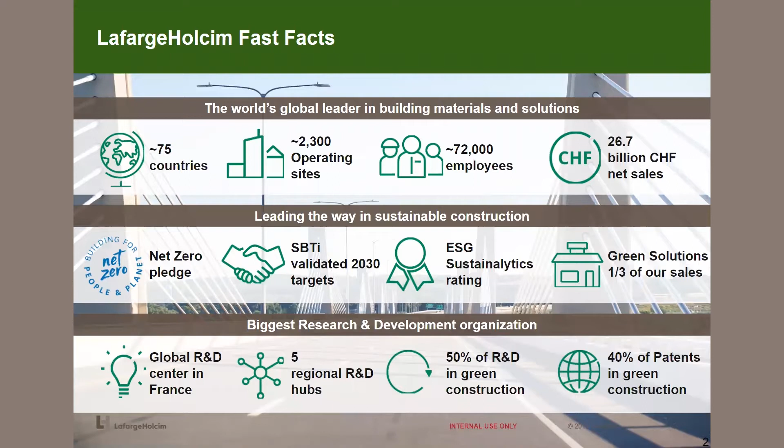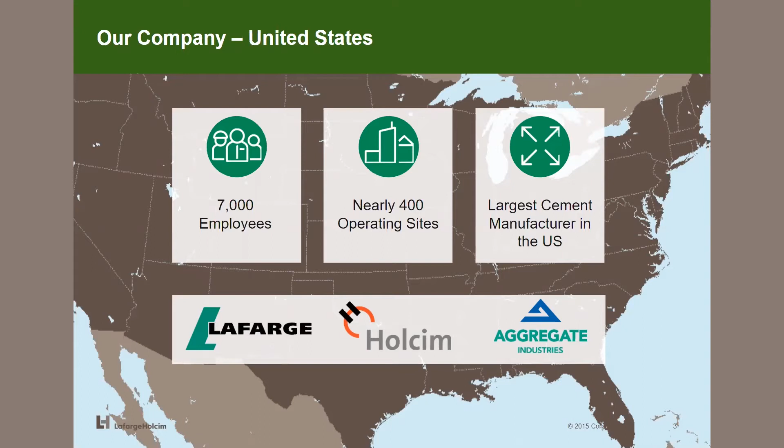In the US, where Joe and I are based, we provide a variety of construction material solutions that include cementitious products, ready-mix concretes, aggregate, asphalt, and engineered solutions. So now that you know a little bit about us, let's get to the topic at hand. Throughout this summit, we've heard a great deal about how our industry is viewed from a sustainability standpoint. And we feel the best way to address this is really just head on.

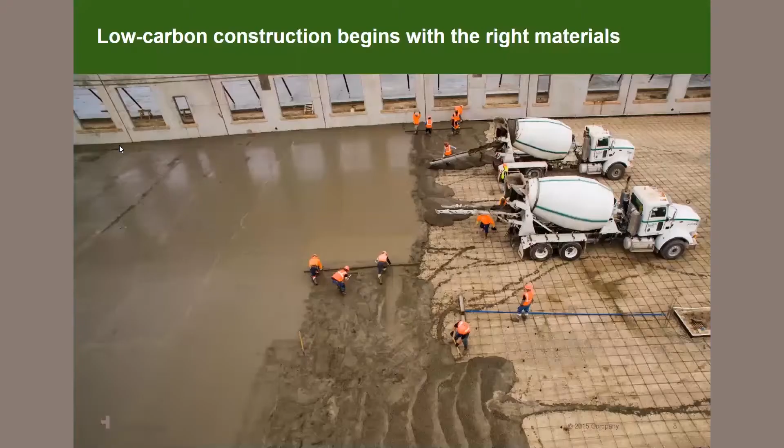Concrete is the most reliable, widely used building material in the world. It has many technical benefits such as stability, it's an energy efficient product, and it offers heat and fire protection. With a growing demand for more sustainable solutions and environmentally friendly processes and building products, concrete is chosen time and time again for its circular economy and its durability, which results in reduced building maintenance costs. With concrete, we are fortunate that buildings are built to last for generations. And even when we tear down a concrete structure, almost all of its components can be recycled and reused.

At LafargeHolcim, we're always thinking of circular material use. The concrete, the cement, and asphalt industry is a fundamental link in the circular economy. In concrete, we are able to utilize recycled aggregates and cementitious industrial byproducts. Whereas in cement, we're able to use alternative fuels in our kilns. And in asphalt, we're utilizing RAP, which is reclaimed asphalt pavement.

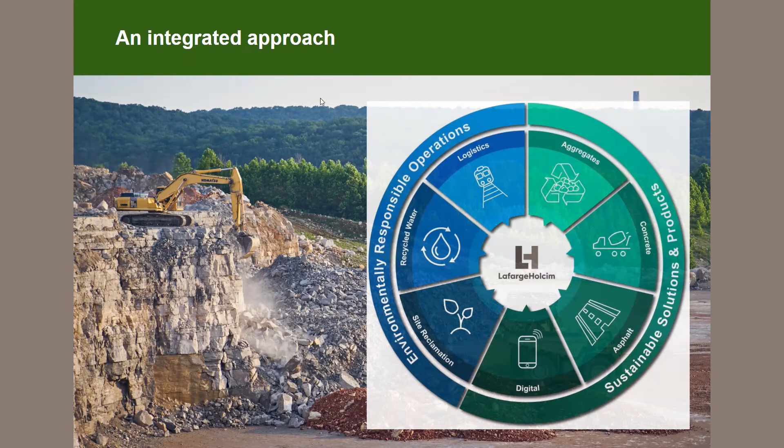As I've said, concrete is a key link in the circular economy. We have to move away from taking, making, using, disposing. That way of construction isn't a sustainable option. At LafargeHolcim, we look at using it, recycling it, making it again, and manufacturing innovative, game-changing green products.

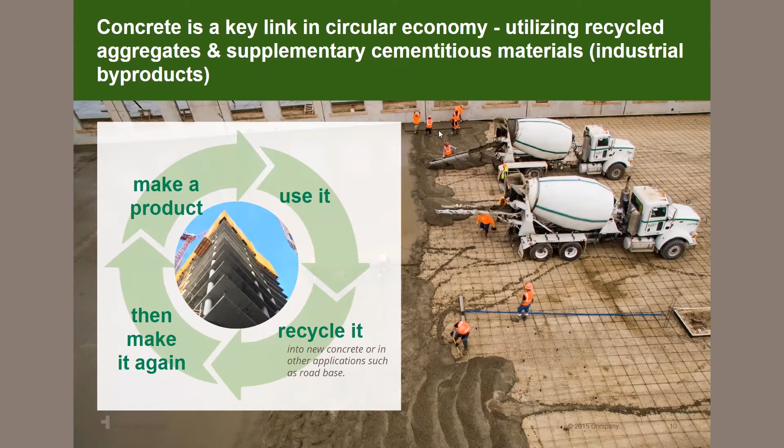Our aim is to continually reduce CO2. Our goal is to conserve natural resources, save energy through the use of supplementary cementitious products such as fly ash, which is a byproduct of coal-fired plants, or slag, a byproduct from steel production.

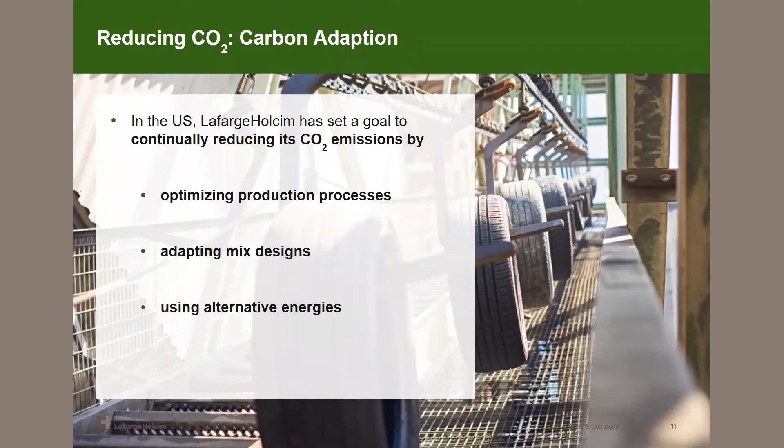When we're looking at the global warming potential, which is a specific measure of how much energy the emission of 1 ton of gas will absorb over a given period of time relative to the emissions of 1 ton of CO2, or carbon dioxide. Today, there's a lot of talk around how building materials impact construction projects' global warming potential over a project's life cycle. And we believe the accuracy and transparency of this data are more important than ever as we move towards a zero carbon future.

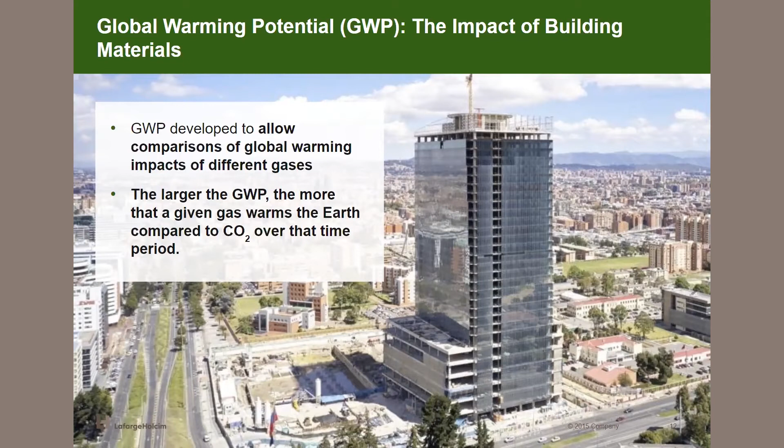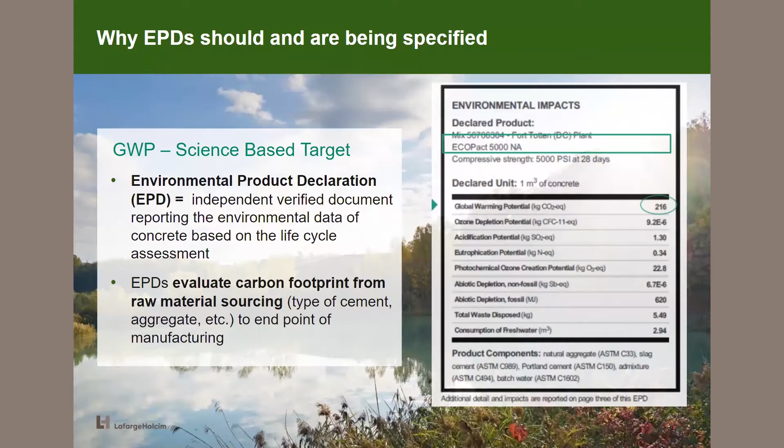LafargeHolcim's Environmental Product Declarations, or EPD, generator process provides very clear visibility in low carbon construction. It helps quantify the environmental impact during the manufacturing process. An EPD is an independent, verified document that evaluates carbon footprint from the start of manufacturing to the endpoints of manufacturing. It's defined by an industrial standard, ISO 14025, which allows consistency and comparability of data, which assists specifiers and contractors in making the right informed decision when choosing a material supplier. We're making it easier to make that right choice.

Now, let's imagine, and quite frankly, we anticipate that in the very near future, selection and purchase of both cement and concrete products will not be based upon performance and price, but we'd be looking at metrics such as the global warming potential and embodied energy. Because we at LafargeHolcim have anticipated this need, I'm really happy and excited to share with you that we're rolling out third-party verified plant and product-specific EPDs for each of our cement plants operating in the US.

In addition, as part of our net zero pledge, LafargeHolcim is launching Eco-Label to transparently communicate the environmental benefits of all of our low carbon building solutions. This label will include important information such as how much CO2 footprint is reduced and recycled content. LafargeHolcim ready-mix concrete plants are doing the same.

We've talked about our industry as a whole, the current trends in sustainable initiatives, and LafargeHolcim's net zero pledge to surpass and exceed these targets. Let's take a moment to discuss some of our innovative products that are available right now. Building a sustainable future starts with concrete.

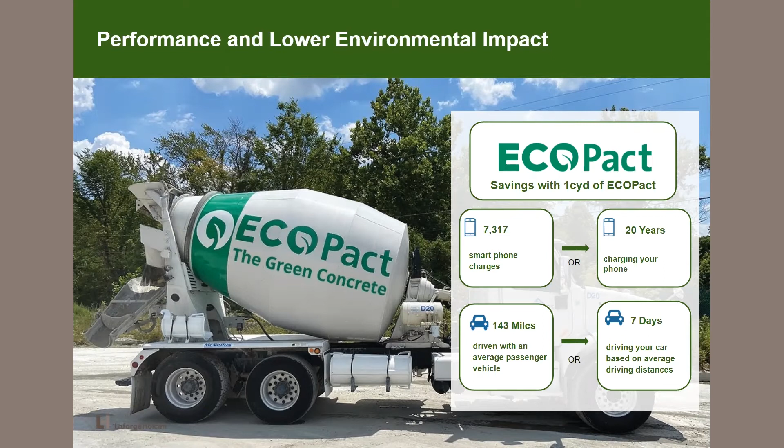Think of an environmental product declaration almost like a food label containing nutritional value. An EPD allows you to make an informed decision, a science-based decision, when choosing the right concrete for your project. The global warming potential, which is measured in kilograms of CO2 equivalent, on a standard CEM1 concrete is represented at 508, whereas a comparable EcoPact green concrete mix is 216 GWP. This is a significant difference in terms of its environmental impact.

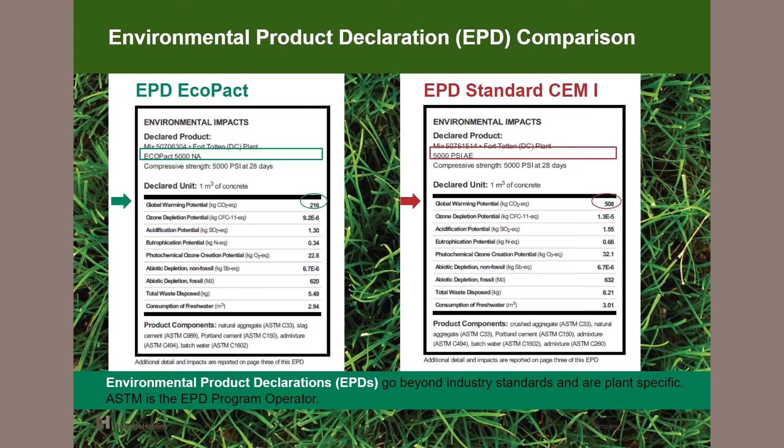The only way to know truly the impact of our products is through a life cycle assessment supported by the EPD process. It allows us to determine factually how much waste is generated. At LafargeHolcim, we believe that through specifying EPDs with GWP targets, this will accelerate the transition to green building and support sustainable design.

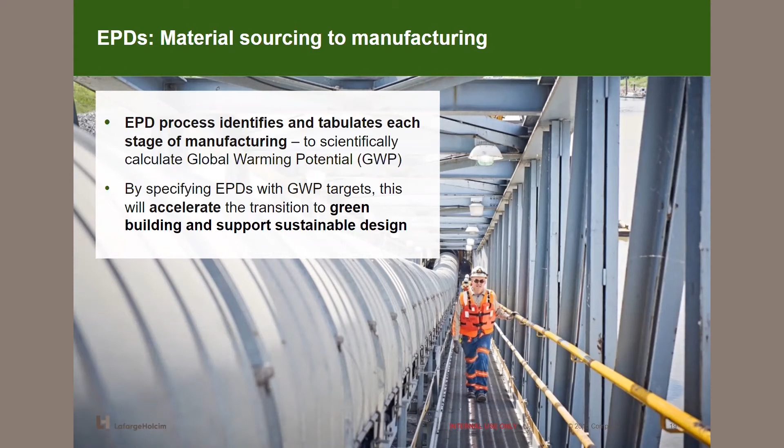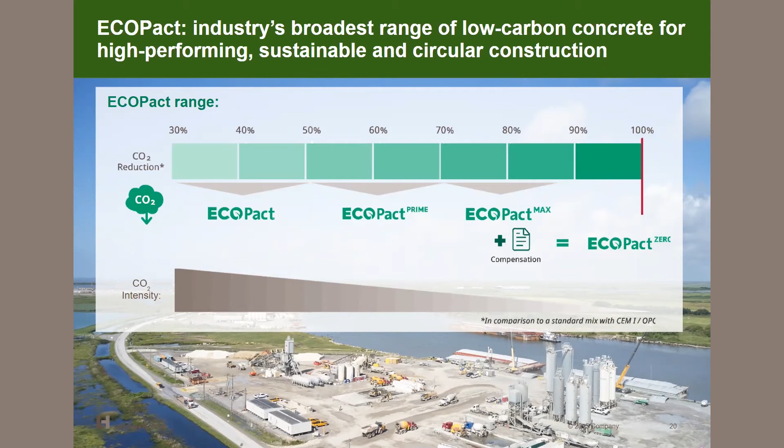LafargeHolcim's EcoPact is designed to optimize cement content with a high portion of supplementary cementitious materials. EcoPact reduces the carbon footprint of concrete and is even able to achieve net zero through partnerships to offset the remaining carbon footprint. EcoPact contributes to a circular economy by closing material cycles and enhances resource conservation.

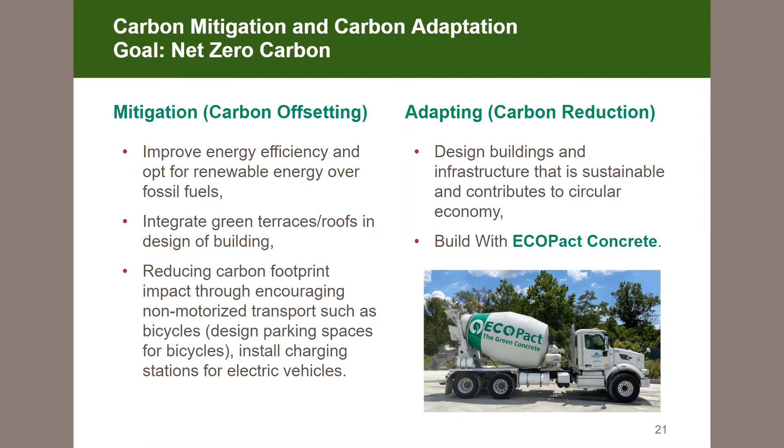Mitigation and adapting are partnered to ensure continued energy efficiency and sustainability in building. However, through carbon reduction, it is taking it up a level to ensure sustainable infrastructure that will contribute to a circular economy. For this reason, you should choose to build with LafargeHolcim's EcoPact concrete.

Well, thanks, Renee. I want to reinforce one of the messages that Renee discussed. Metrics play an extremely important role in the development of solutions. That's why we like the EPD system. It's multifaceted. It captures the impacts of a variety of innovative initiatives that we are employing in our net zero pledge.

So for example, if you convert a plant, say from a long wet to a short preheater precalciner system, or if you use renewable energy, or if you reduce clinker content in cement through the use of low carbon materials, all of these initiatives will be able to be captured under the EPD system.

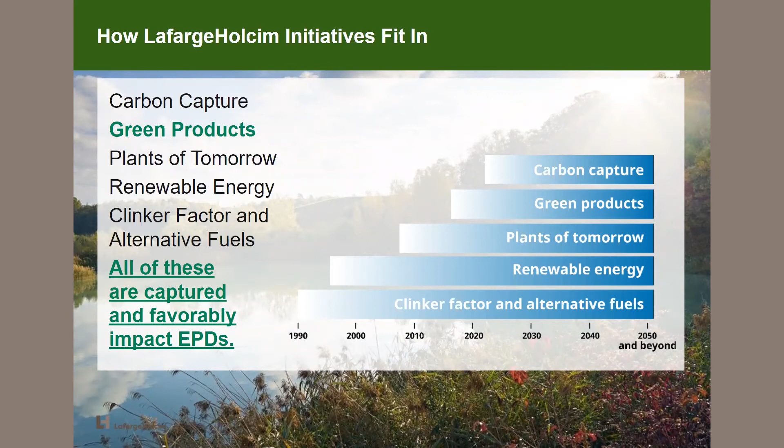But even more than that, and here's where this stuff gets really cool, carbon capture technology has the potential to make a great impact on CO2 footprint. And you'll see its effects directly right on the eco-label EPD. We're currently even researching this technology at our cement plant in Florence, Colorado. It's exciting stuff.

So what does this mean for cementitious products? It's pretty simple. It means options. Now, as you might be aware, SCMs such as fly ash are becoming scarce, and new and innovative SCMs are emerging all around the country. So slag cements, natural pozzolans, reclaimed bottom ashes, recycled glass, all kinds of fun amorphous silica products, they're coming to the market. And there's still a large demand for high quality SCMs because we still need them to enhance the durability, strength, and performance of our concrete.

And in fact, ASTM and AASHTO are working towards a collaborative process to streamline this process. ACI is discussing ways to expedite the specification development process, but we also still have to do this safely.

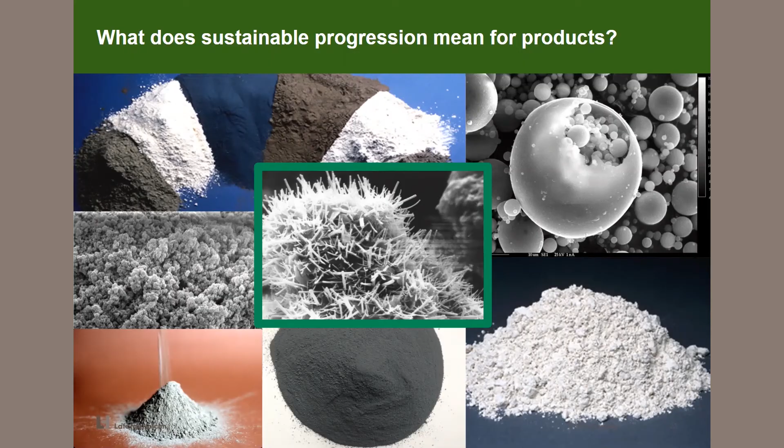And to aid in the understanding of this aggressively developing market, LafargeHolcim has created a housing for all of our innovative solutions, a family of cementitious products to allow the user to keep up to speed on all the products that we're offering that have a specific benefit to sustainable metrics, and everything we're developing in the future. All of these products are engineered to meet current industry standards, and you have the ability to use them today. As we develop and market more products, more will be added to this family, and you can go here and keep track of what's emerging.

But more than that, the supporting tools for the sustainable design engineer or architect, so those of you in the room that do that, such as EPDs, material certification reports, engineering data sheets, and even technical support, they're all going to be right there.

And I want to take the time to highlight one of these products, what we consider the lowest hanging fruit on the cement side with regards to implementation of sustainable products. We call it OneCem. It's the one cement that you can use. It's a Portland cement equivalent.

OneCem is a Portland limestone cement, sometimes referred to as a PLC, and it meets ASTM C595 for Type 1L standards. It's designed and processed to be a direct replacement for Portland cement, a truly plug-and-play product, and it enables the user to use the same amount of fly ash, slag cement, or other SCM that they were using before. If you need enhanced sulfate resistance, such as Type 2 or Type 5, there's options for that as well under 595.

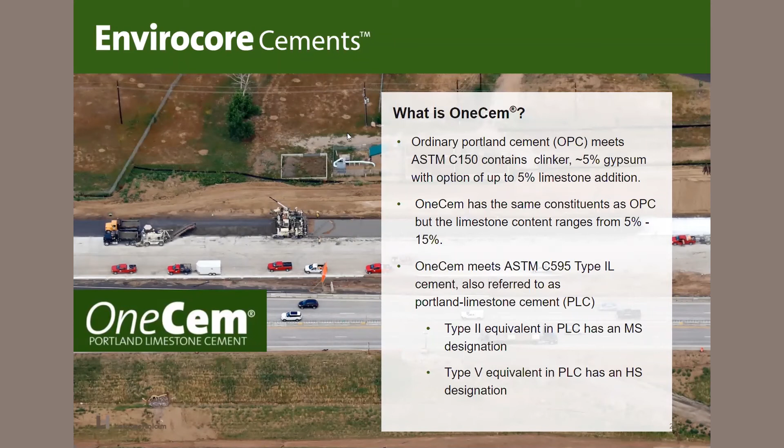Now, this is not a new concept. It's referenced actually in several of the presentations that we've had at the summit. It's been discussed. And it's been used extensively around the world and even in the US for decades, and has a proven track record for performance and durability.

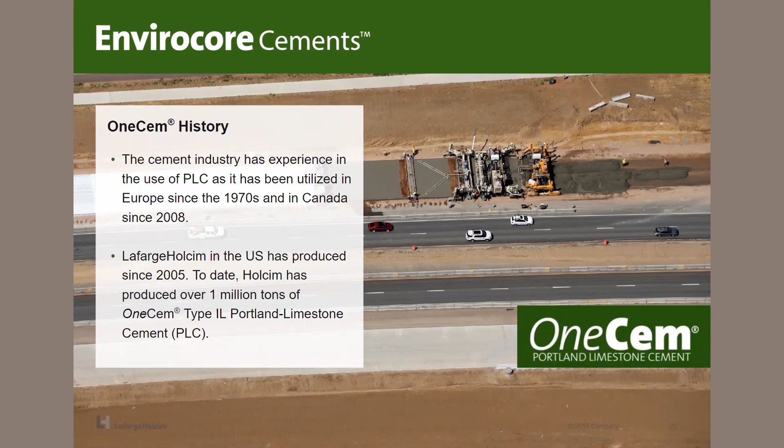Now, in part of my region, which is Minnesota, OneCem PLC has been used successfully for over 15 years. And it's allowed and utilized as an equivalent product to Portland cement today. So you use 30% ash today with Portland cement, you use 30% ash today with OneCem. It's designed to be equivalent.

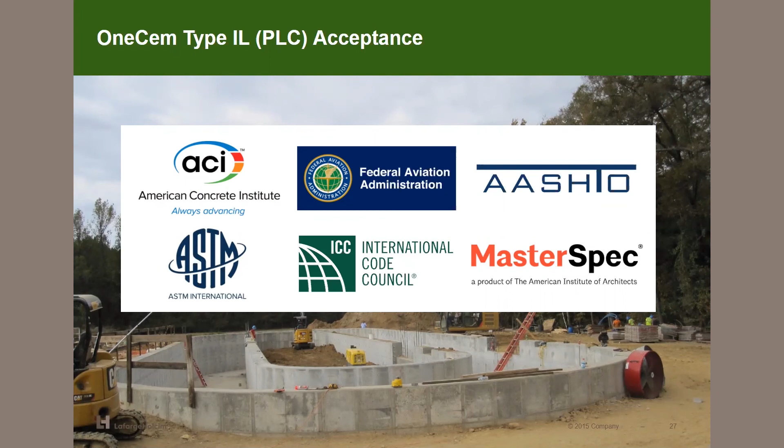In addition to this, there are accelerated efforts in each of these individual organizations, as I said before, as well as collaborative efforts to allow for rapidly emerging technologies while ensuring that the high performance and durability that all of our products in the concrete industry are known for continues.

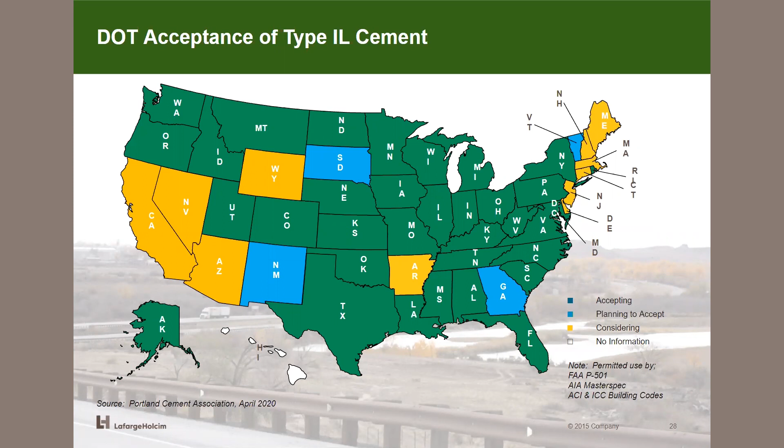So in addition to the industry side of things, transportation agencies have also widely accepted the use of PLC. As you see here, the vast majority of these already accept PLC as a direct and equivalent replacement. They allow the same amount of cement, same amount of fly ash, the same amount of slag cement replacement, same amount of ternary used with PLC as they do with Portland cement.

Now, I wanted to take the time to reiterate that Portland limestone cement is not just a LafargeHolcim product. It's an industry-wide initiative. Because of the nature of how PLC cements are made, a vast majority of cement producers can utilize their current facilities today to make these products available and to have an immediate industry-wide reduction in carbon footprint.

So for more information on this PLC initiative, I would invite you to visit greenercement.com. There are lots of tools there, resources available, case studies, how this is being implemented in the US, as well as references on how the industry standards that I just referred to, the ACIs, the ASTMs, all of those, can be implemented to allow PLC as an equivalent product, as well as other blended and performance cements that are available and coming down the pipe.

So if there's one takeaway from this presentation that we would like for you to take to heart, and in particular the specifiers in the room, it's this. We have the capability today to make highly impactful, reduced CO2 solutions at the majority of our operations, cement plant and ready mix. However, it is very difficult for us to bring these products to market if the acceptance in specifications and projects is not there. So you play a crucial role in the net zero process.